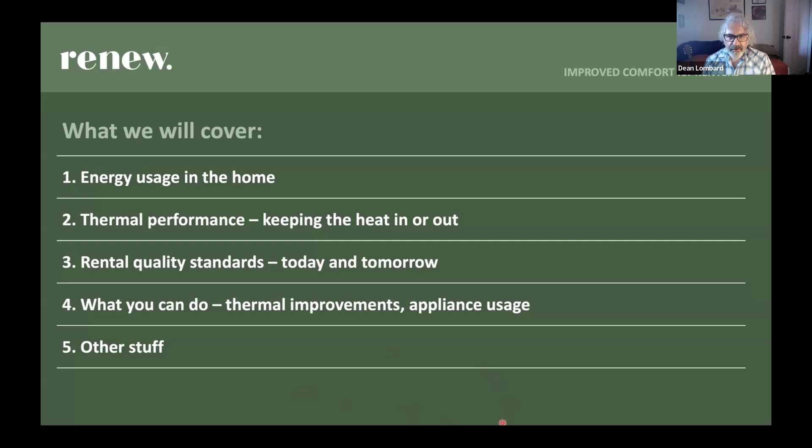Energy usage in the home. Energy is that thing where we don't really know much about how we use it generally. We know how much we pay for it when our bill comes, we know that we need it when we want to turn on an appliance, but we often don't really know how much appliances are used for different things.

This chart here is sort of an average Melbourne home and what proportion of its total energy use is used for these different functions. I think this is good to understand because if you're trying to save money on energy, use energy more effectively, you want to think about what are the biggest usages and how can you improve the way that you use those. So of course this is an average.

It varies a lot according to the types of appliances you have and the climate and the weather patterns, as well as your lifestyle. But generally speaking, nearly half your energy that you use in a year in Melbourne is used for heating, because we're actually a relatively cold climate most of the time. Not that much for cooling, but it's still significant.

The next biggest chunk is hot water, which is nearly 30%. That varies a lot depending on what sort of hot water appliance you have, and we'll be touching on those appliances a bit later. Cooking, not very much. Fridge, also not very much, but both of those are more than the smaller stuff like lighting.

I often like to emphasize, fridges do use... a good fridge uses a bit less than 5%, but a bad fridge, like an old inefficient fridge, can use 2 or 3 times that much.

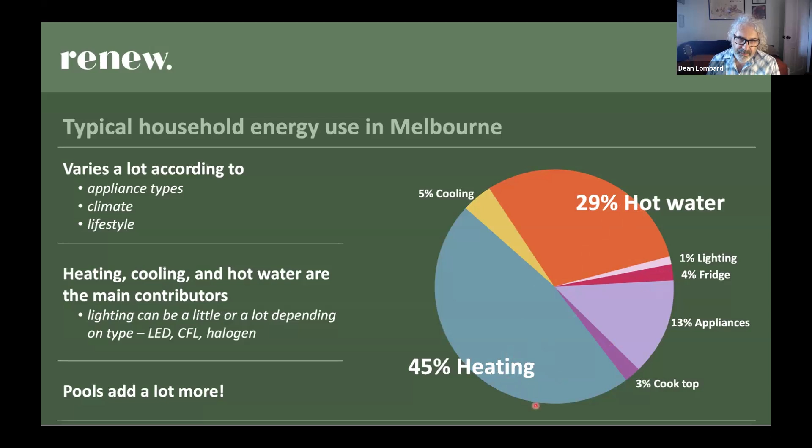Fridges are one of the most effective ways people can improve their energy usage in the home, without looking at heating and hot water. Get a more efficient fridge—really old fridges use a lot more than modern efficient ones. But for the purposes of this, we're really going to be focusing on hot water and heating.

They are the ones that most affect energy usage, and heating and cooling most affects how comfortable you are. I also like to remind people that your electricity and gas bills have really useful information on them. One useful thing is this little chart that usually shows your bill amount or energy usage over the last several bills.

It's useful to know your energy usage per day in kilowatt hours and how that compares with the average for the number of people in your household. It's good to compare what you're doing with others, because it shows you if you've got an opportunity to save a lot of energy or just a little.

The Energy Made Easy website—.gov.au—has a really good and easy to use comparison of home energy usage. You type in your postcode and how many people are in your house, and it'll tell you how much electricity or gas people in your area with the same number of people use. That gives you more of a clue as to whether you're using a typical amount of energy, or less or more. If you're using a lot more, that's when you probably know there's something you might be able to do to use less.

Anyway, that's the basics. Thermal performance—I like to say the house is our biggest appliance. It's an appliance designed to keep you comfortable and to keep all your stuff out of the weather. A good principle for the thermal performance of housing, for anything really to do with comfort and temperature, is that heat goes to anything that's colder than it.

That's why when you put warm cans in an esky with ice, the ice melts—because the heat from the warm cans goes into the cold ice and melts it. That's actually what makes your drinks cold. But that's a general principle: in winter, you fill your house full of heat with your heater, and it tries to get out any way it can to the cold air outside.

Unfortunately, as a renter, you can't really do much about that unless your house already has it. I've known some people who've had a chat with their landlord and got them to install insulation. Other people don't want to bring it up because they're trying to keep a low profile—we're all in different situations. It's always worth sticking your head up into the little access hatch in your ceiling to see what sort of insulation is there, just so you know what you've got.

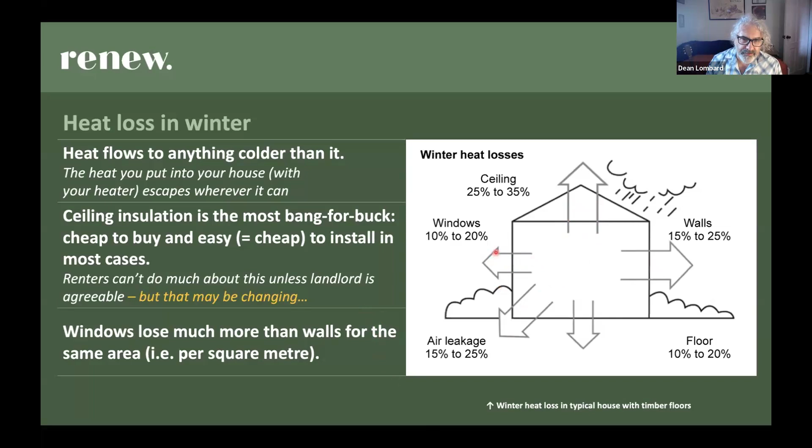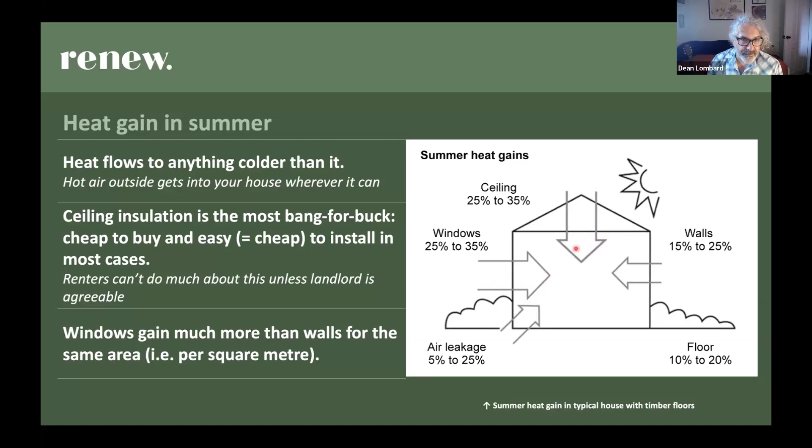In summer, it's pretty much the same areas, but the opposite. The hot air outside tries to get into your house, which is probably still a bit cooler inside at the start of the day. It comes in from the same ways, so again the windows are really important, and so is the ceiling.

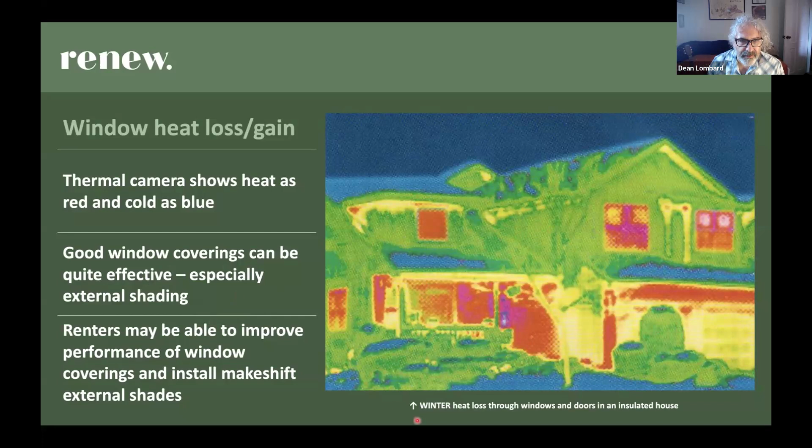I like to show this picture to illustrate the point about windows. This was taken with a thermal camera, which photographs heat - red bits are hotter, green and blue bits are colder. This is winter, and this house has ceiling insulation, so heat isn't coming out through the ceiling. But the heat inside is coming out through all the windows, the doors, and the garage door. This shows that windows are one of the most important parts of this - even with great ceiling insulation, windows become the weakest point. It's the thinnest part of the house, where you're most likely to lose heat, and good window coverings make a really big difference. We'll talk about window coverings in a bit, but that's the point.

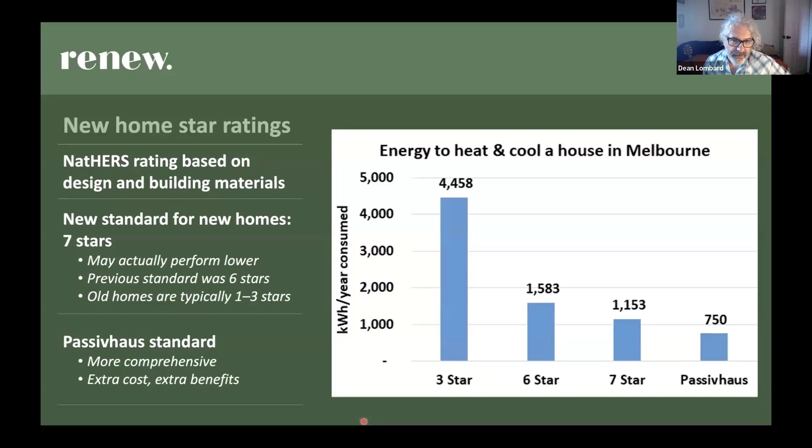So if you're in a newer house, you've probably already got some of these benefits. If you owned a house, this would show why it's important to add thermal improvements. And if you're renting a more than 20-year-old house like I am, this shows how far behind the eight ball we are, because we don't have the authority to add ceiling insulation or fix drafts, walls, and windows. This is actually the background to one of the reasons we've had these changes in rental regulations lately to improve quality - and that's what I'm going to talk about next.

Until a few years ago, there were no quality standards at all for rental houses. In fact, the only thing a rental house had to have to be legally rented out was a smoke alarm. You could rent out a house without glass in the windows, without a lock on the door, with no ceiling insulation, without running water, without a toilet - as long as it had a smoke alarm, you could rent it out.

That's a huge oversight of regulation for decades in Victoria, and it was addressed a few years ago because these issues - health, safety, and utility costs - were known problems for tenants, and most owners of rental properties didn't take up government schemes offering discounted upgrades such as free ceiling insulation. We also found from research that the quality of a house didn't really have any bearing on the rent being asked, except at the very high end of the market. In the same street, a house in poor condition and one in good condition would go for the same price. So the market wasn't working - that's one reason these standards came in.

As Kelly mentioned earlier, there's a longer term thing happening where the gas network is declining, gas is running out and becoming expensive. Efficient electric appliances are much cheaper, and we're moving towards a world where most houses will have electric appliances instead of gas. Rental standards are also part of ensuring rental houses upgrade to efficient electric appliances rather than stay on the gas network, which will ultimately cost people more money.

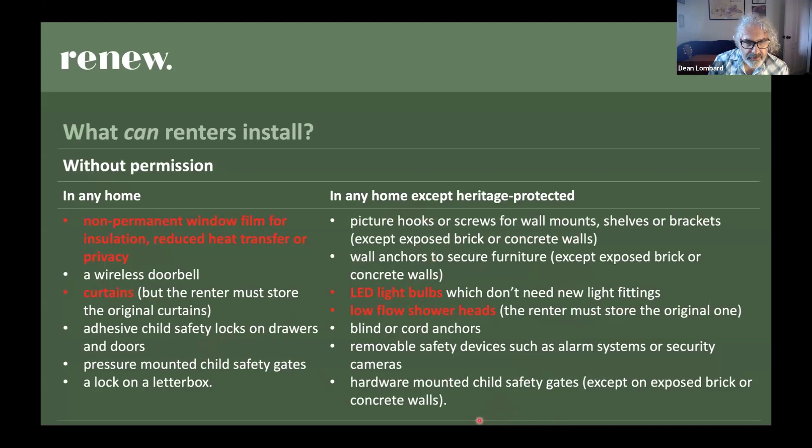I wonder if ceiling insulation might come into this. If you ask the landlord to have ceiling insulation installed, they would sort of have to agree. You'd have to get it installed professionally, but that's probably only an option if you're going to be in a house for a long time, because it's a bit expensive and has a few years' payback.

Now, there's some new standards coming in. They've done the consultation on this - they were supposed to announce them a month ago, but they didn't, which is why all the dates are a bit uncertain. But these are basically some improvements, building on those existing standards.

One of them is that from the end of life of existing heating, they'll have to replace it with an electric heater with 2 stars minimum. There's also a cooling requirement on a new rental agreement, or at the end of life of existing cooling.

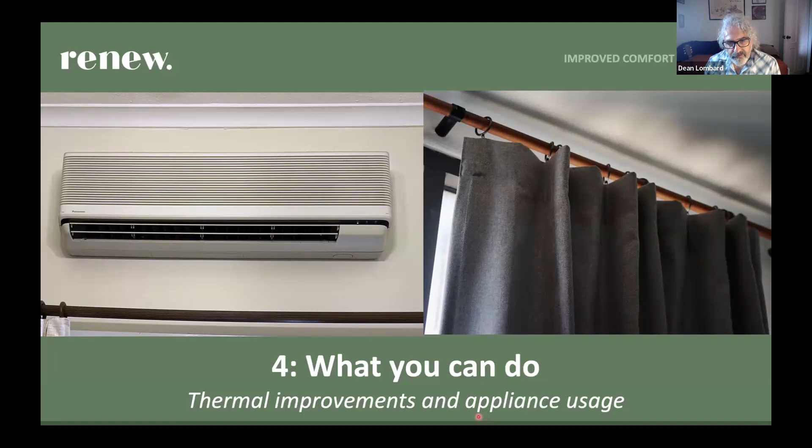I'm now going to talk about some of the stuff you can do as a tenant to improve how your house performs with energy. I'll make a note when the stuff is already covered in those standards, because some of it we can expect to see the landlord or owner being required to do. I did want to quickly throw this out there.

There's this thing called the Residential Efficiency Scorecard. It's basically a household assessment tool where an assessor will come out and look at a house, looking at the insulation, the windows, and the appliances, and give a report on how well the house performs in terms of energy usage. This is really useful because if you've got a house with issues you don't know about, these reports help identify the biggest bang for buck, like doing something with a particular window.

Obviously there's a lot more potential for an owner to make use of this tool than a tenant. But I've had one done as a tenant, and the assessor gave me advice based around what I could do as a tenant to improve my energy usage. So I still found it useful.

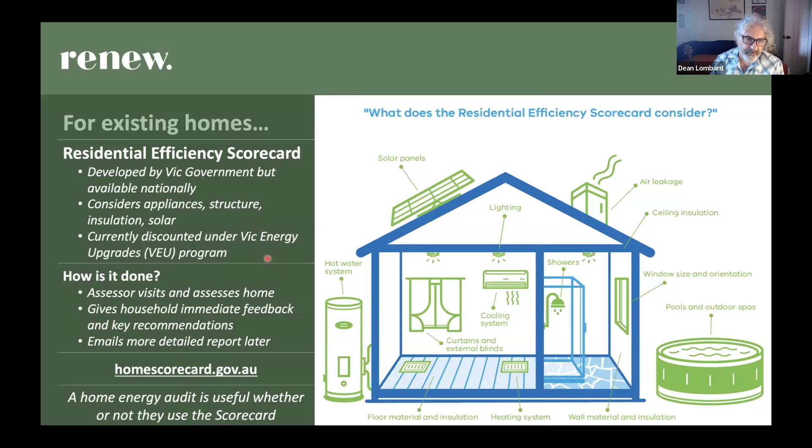Something to think about, probably if you're pretty confident you'll be in a house for some time, because you have to pay for these. They generally cost between $250 and $500, which is a bit of money, but you can get a discount through the Victoria Energy Upgrades program of $120, which means it could end up being a few hundred dollars. If you knew you were going to be in a house for 3 or 4 years, that might be worth spending to find out how to save energy and money. That's your call, I guess. I was lucky with mine, I got it for free when the scheme first came out and they were doing free ones for renters.

The other way to do it is to look at the obvious stuff, like are there drafts? I'll talk about this in a bit.

I wanted to make this note about insulation. I've known some tenants who've attempted to put in their own ceiling insulation. This is really not recommended. It's not a type of modification that tenants are permitted to do, and it's also very inadvisable for anyone without the experience or training, because there are serious safety issues with installing insulation, due to electrical wires and other hazardous materials in the ceiling. If you were installing ceiling insulation in your rental house and it caused a fire, that could be pretty bad in lots of ways. So just don't.

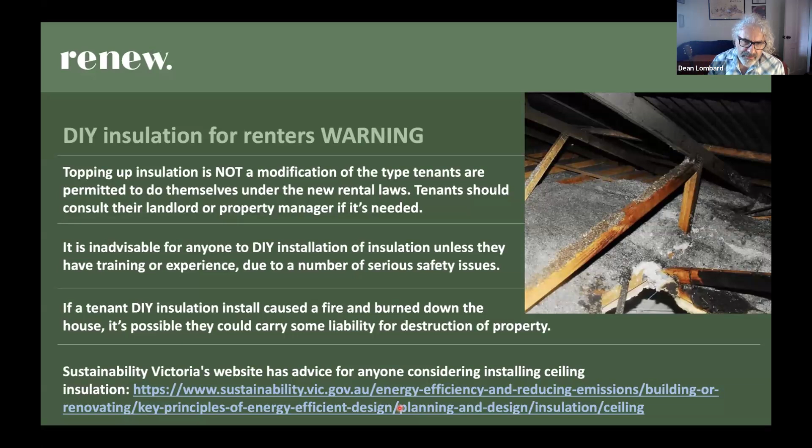If you really want to get some movement on insulation, I'd talk to your landlord. If you're pretty confident you'll be in a house for several years, it might even be worth cost-sharing it with the landlord if that's what you needed to get it over the line, because ceiling insulation can save a lot of money. But yeah, don't try doing it yourself.

The most effective things renters can do is really window coverings, if your curtains are not very good. You can get special thermal curtains designed to stop heat from passing through, and they're quite expensive but work really well. But really, any thick curtain will do the job. I generally say if you could use a curtain as a blanket, then it will work well as a thermal curtain. The most important thing is that they cover the window fully.

Ideally they go past each side a bit, and up past the top and down past the bottom, to completely cover the glass in the window, because the glass really conducts heat a lot. That's what happens: the warm air in your house hits the cold glass and goes straight through. The same thing happens in summer with heat getting into the house, but the effect is even more in winter.

So if the curtains in your house are just thin and the light shines through them, you can get thick curtains pretty cheaply from op shops, garage sales, and stuff. Hang them yourself, because you're permitted to do it without permission, and it can make quite a difference.

To get the best difference, you would improvise pelmets, which are like a cover that goes over the top of the curtain. I've done them before with pieces of cardboard or corflute, resting on top of the curtain rod, with a bit stuck on it going down the front. It just stops this thing that happens, which is on the next slide.

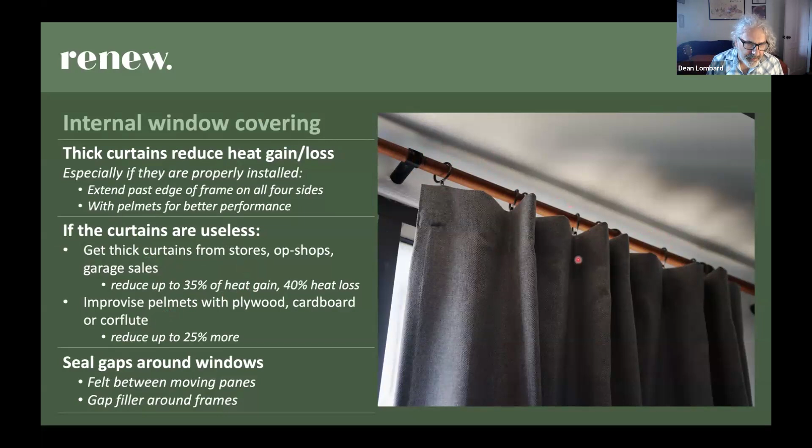There's this whole thing that happens when the warm air in the room goes down between the curtain and the window, and all the heat gets sucked out through the window. The air becomes cold, then it comes around again at the bottom and creates a cold draft, actually making you colder. Covering it with a pelmet, which is this thing here, stops that whole process and makes a huge difference.

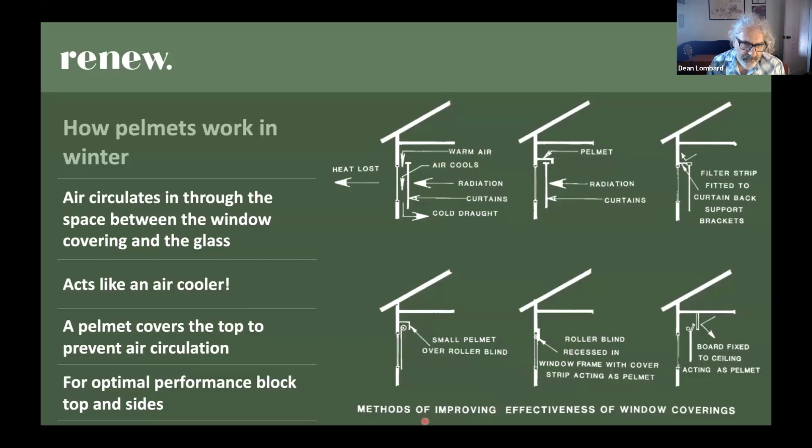Window coverings stop about 40% of the heat loss that would otherwise go through the glass. Pelmets reduce that by about another 25%. They're very effective, so you can improvise them, and that's a good thing to do if your curtains aren't well set up.

You've probably heard of double glazing, which is expensive windows with two bits of glass that have air between them. This is standard in Europe and other cold climates, and it's now pretty much required by the modern building code in Australia for new houses. But I thought it was interesting to point out a study done by Sustainability Victoria a few years ago, which found that thick drapes with pelmets save almost as much energy as double glazing, for much less cost.

So this is just to run the point home: curtains are really effective at keeping heat inside your house, and pretty good at keeping heat outside the house in summer.

The other thing is what they call renter's double glazing, which is bubble wrap stuck to the window. This is a photo of my window in my lounge room. I haven't done pelmets in this place. These are relatively thick curtains, but I still used to get this cold air feeling off these windows because it's such a big window. So I tried this thing that had been recommended to me, which is to stick bubble wrap on the glass, and it makes a heap of difference.

It cuts down the thermal transfer because it's like double glazing. It creates an air pocket between the room and the glass, keeping warm air in the room separate from the cold glass. It's very easy to put on: you get a spray bottle, spray water on the window, and stick the bubble wrap on. Works great, very cheap.

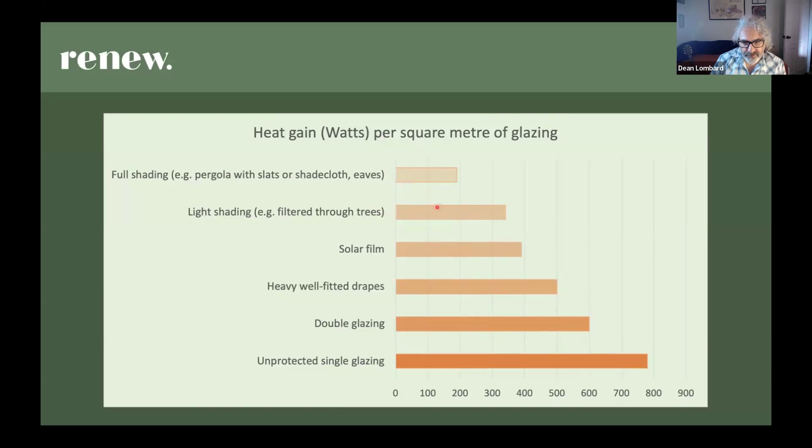That can be a bit tricky for tenants. It depends on what you can do. It's the sort of thing that's often done by the way a house is built, like eaves, or if there happen to be trees planted outside.

One of the principles here is that the sun is higher in summer than in winter, and well-designed eaves or pergolas like this will be designed to block the sun in summer so the window's shaded, but let the light through in winter, because in winter you want the sun shining through the window to warm up the house. If you owned a house, a good way to do it is to put these slatted pergolas with the angle set just right to let the winter sun through, but not the summer sun.

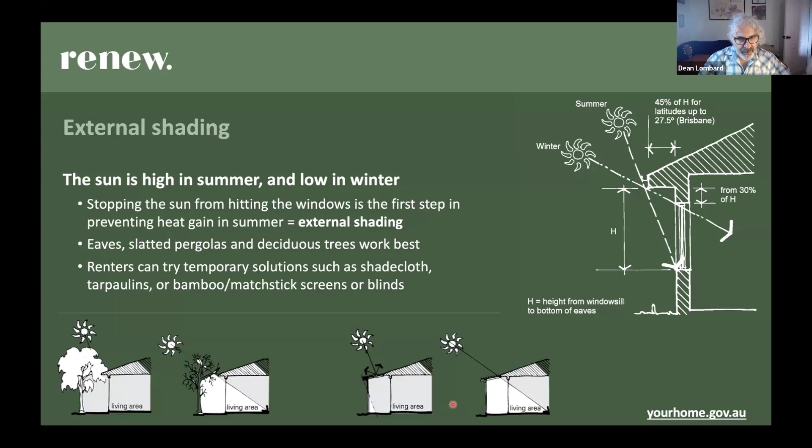As a renter, though, you've got some opportunities to put stuff on the outside of your windows on hot days. Shade cloth or tarpaulins, bamboo or matchstick screens or blinds. I've certainly got a big window at my place where I attach some shade cloth underneath the eaves and stretch it out to a couple of tent poles in the backyard to make a shaded area.

Works quite well. Here's some pictures of some different window treatments. This one is obviously a custom-made sort of shade cloth, but you can see how effective it is. You can sort of improvise stuff like this, stretch it to a fence, a tree, or a tent pole like I've done.

This is a picture of those slats, which you can't really do unless you own a place. If you've got these blinds on your place, and a lot of old places have these, they work very well. They're quite thick and have good thermal properties.

Another way of doing it is you can use bulldog clips to clip shade cloth to the guttering, and then either hang it down or stretch it out and attach it to the top of the fence or to a tent pole. I use tent poles, very useful. These are the sort of improvised solutions that aren't quite as effective as having it done properly, but they will make a big difference.

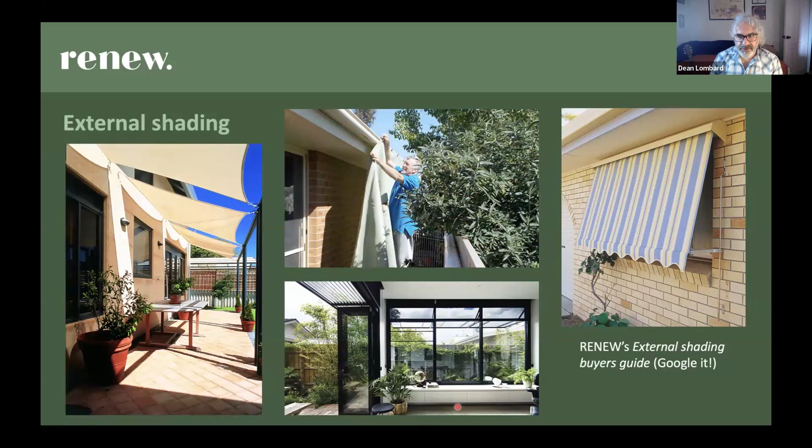As that chart showed before, keeping the sun off the windows in summer is the number one thing you want to do to keep cooler in summer.

As mentioned before, the current rental standards say the house has to be structurally sound, which probably means no gaping holes, and you get big drafts through gaping holes. The new standard requires draft sealing around doors and a few other areas of the house. That will make a big difference.

But the other thing in the current standards is that you are permitted to do draft blocking, including installing seals and using caulking to fill gaps with permission, but the owner cannot unreasonably refuse permission. So if you can identify where the biggest gaps are, you could talk to your landlord about it, or do stuff that's sort of structural to fix them.

A good way to find drafts is on a windy day, walk around the house in bare feet and you'll feel them. Some people use an incense stick or a candle and see which way the flame blows, then follow it back the other way, because there shouldn't be a breeze in your house unless there's a draft.

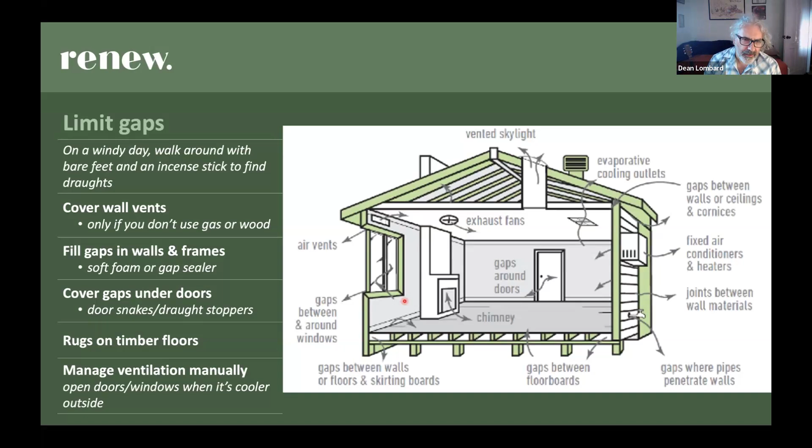It's good to think about ventilation as a positive thing too. In summer, monitor the outside temperature versus the inside temperature. Having a couple of thermometers is good for this, because when it gets cool outside, that's when you want to open up some windows and doors so the cooler air comes in and cools the house down. Vice versa, once it starts getting hotter outside, that's when you want to close up doors and windows to keep the cool air in.

This thing about thermal mass, I'll just throw this in. There's nothing you can do about it - basically your house will have thermal mass or it won't. Thermal mass is solid, dense material that soaks up heat, like a brick wall or a slab of concrete. It soaks up the heat, stores it, and then when the air outside becomes cooler, it releases the heat back out.

This is great in winter if you've got a brick wall. I've got a wall in my house that's a brick wall the sun shines on, with a big concrete driveway next to it. As soon as the sun goes down, it radiates into the house from all that thermal mass, all that heat stored in the concrete and brick, and it's great. In summer it has the opposite problem, because it does the same thing - it soaks up the heat and throws it into the house that I'm trying to keep cool. So in summer I put some shade cloth over it so it doesn't get direct sun, doesn't soak up as much heat, and doesn't make my house as hot.

This is an example of something you can't do much about - whether you've got thermal mass in annoying places or not - but have a look around and figure it out. If you've got thermal mass that gets sun, work out if you can cover it during summer or make use of it during winter, to use the heat or keep the heat, depending on the season.

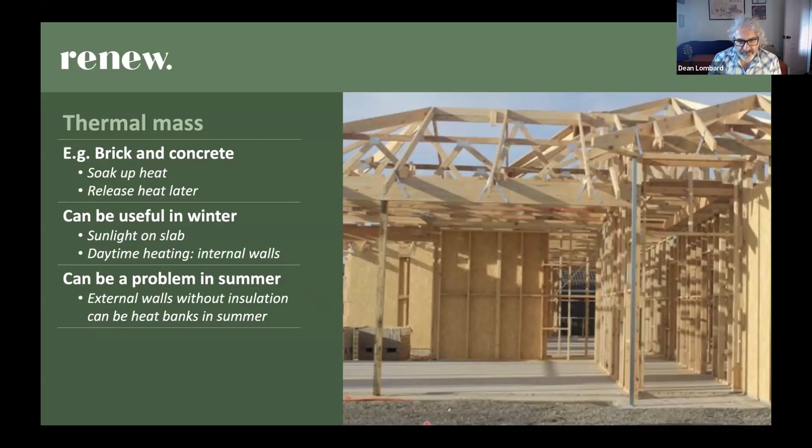That's the main stuff about thermal performance. I may have missed some stuff, so please throw questions in the Q&A if there's something you want to know that I didn't cover.

Standard types of heating you might have: a reverse cycle air conditioner, a console gas heater or a wall furnace - the tall ones - or a ducted heater. These all comply with the current rules around heating in rental houses. The gas ones, though, when the new rules come in, will need to be replaced with some form of electric heating when they reach their end of life. That's part of the government roadmap towards electrification, as gas becomes more expensive and harder to get. But for now, they're all allowed.

Some houses have both, because a lot of places have a reverse cycle air conditioner installed as well as a gas heater. Good to know is that reverse cycle air conditioners, if they cool and heat, are much cheaper to run for heating than any gas heater because they're much more efficient - 400 to 600% efficient, compared to 80% efficient for a console heater and as low as 50% efficient for ducted heating. They cost less because they basically extract heat from the air to make the heat that goes into the house.

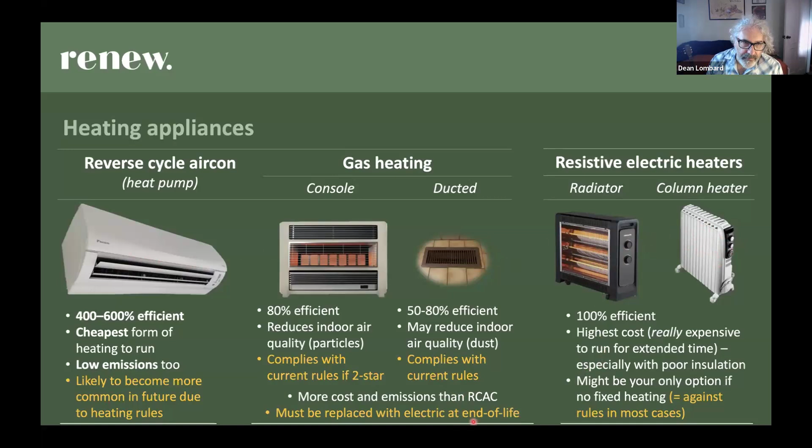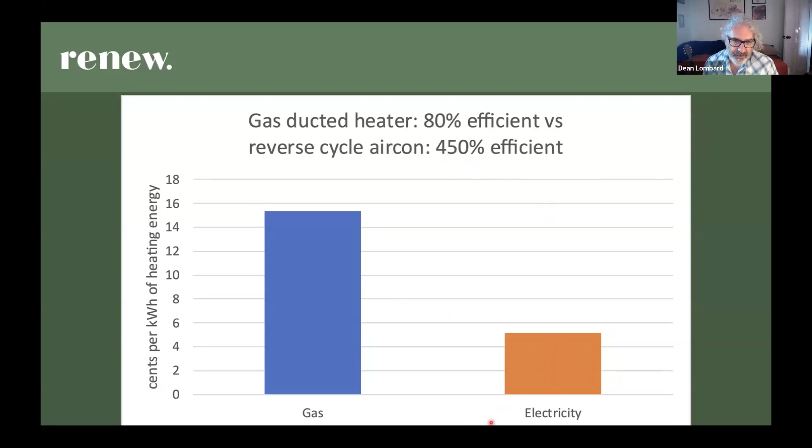Here's a price example, just because sometimes people don't believe me. This is the cost comparison of doing the same amount of heating with a gas heater versus a relatively not particularly efficient reverse cycle air conditioner - it's less than half the cost. This one is 450% efficient, and it's actually not a very good one, probably a 10-year-old model. So it's much cheaper - we did this analysis at Renew. It's undeniable, it's so much cheaper to heat with a reverse cycle air conditioner than a gas heater. Keep that in mind, because a lot of people don't know that.

Cooling appliances - it is getting hotter, we're getting hot days more often. Cooling will be part of the new rental regulations, expected no longer in October 2025, but probably early 2026.

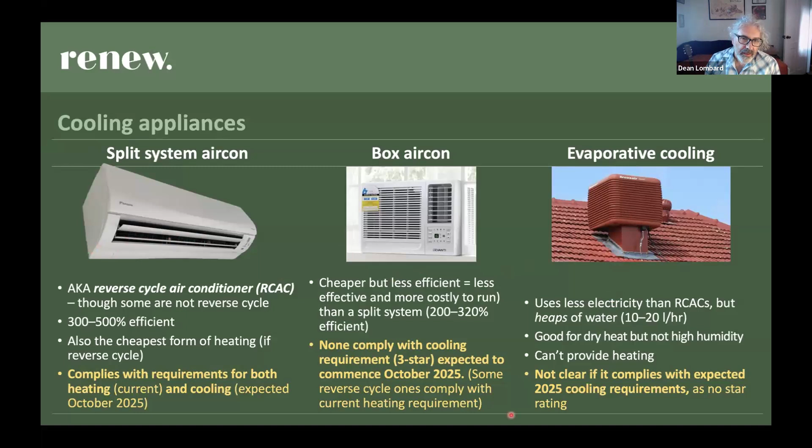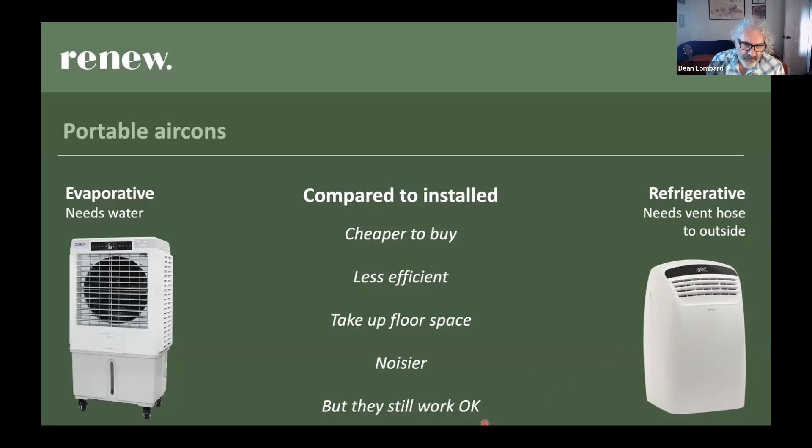For places without cooling, I know some people use portable air conditioners. These are basically versions of what I talked about in the previous slide - the ones you need to put water in are the same as those on the roof, and the ones that need a hose going outside are the same as the ones on your wall. They're relatively cheap to buy compared to installing those other things, but they're less efficient and a bit noisier. They work okay - if you need cooling and you've got one of these, it's not the worst thing in the world. But hopefully when that cooling requirement comes in, it won't be necessary.

General heating tips: especially if you've got heaters in certain rooms, close the doors and just heat the rooms you're using - a heater designed for one room won't be enough to heat the whole house. But if you've got ducted heating, you need to keep doors open so the heat can circulate and return to the inlet.

Otherwise, you'll actually get a draft that'll make you feel colder. In bathrooms, fan heaters or ducted heaters are not so good, because the moving air cools you, even if it's hot air. And when you're wet, you feel it more.

So the best heating for bathrooms is strip heaters like this, or if you've got these installed, those heat lamps. Just make sure you remember to turn them off. They don't use that much electricity if they're on for 10 minutes, but if you leave them on all day, they do.

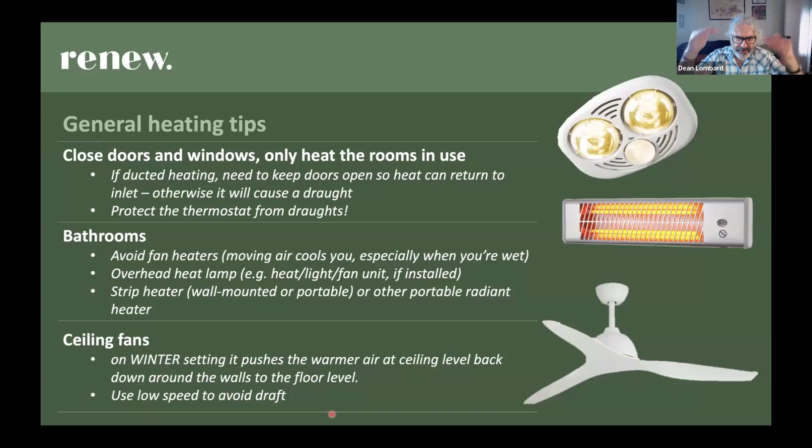So some sort of radiant heat is good for bathrooms. If you've got ceiling fans, they normally have a winter setting that actually helps to spread the heat around the room. Find the winter setting of your ceiling fans if you've got them, and use them when you're heating. Use them on low speed so that you don't get a draft, but they're quite effective at recirculating the warm air that tends to gather at the top of the room.

If your heating's really ineffective, think about personal heating. In the end, it's your body that you need to keep warm. Heating the room is nice. Heating the body is important.

You can get electric throw rugs. There's lots of options, small radiant heaters, especially if you're working from home in a cold room. Put warmer clothing on. Hot water bottles and wheat packs are also useful for personal heating.

Be careful of the safety risks with these, though. Hot water bottles should be replaced every year, and you shouldn't use boiling water - you should put water in that's about 70 degrees. And wheat packs, follow the instructions. If you overheat them, they can catch fire.

General cooling tips: fans work pretty well. I've got one going now. They work on the same principle as ceiling fans, and for the same reason that you shouldn't use a fan heater in a bathroom - the moving air makes you feel cooler, even if the air is warm.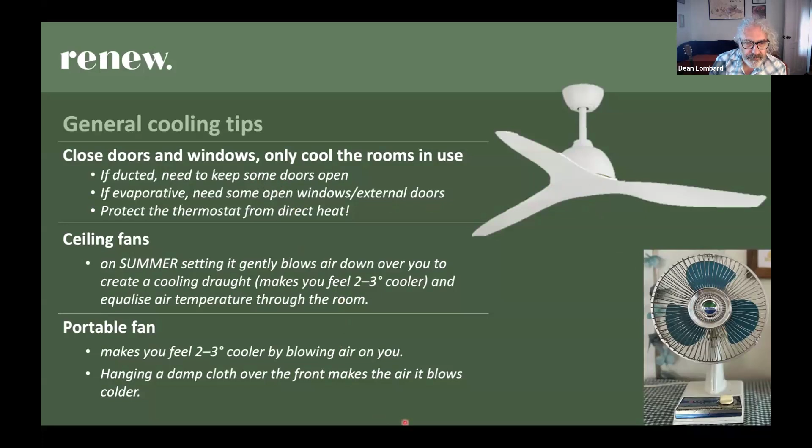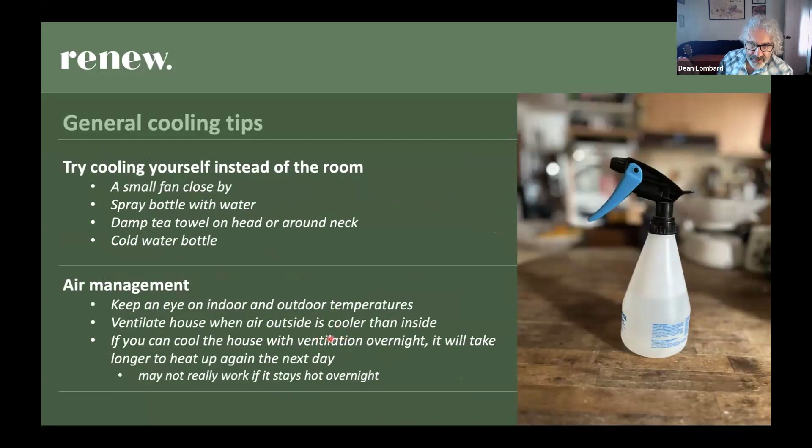Again, for personal cooling, when it's really hot, spray yourself with water, use a damp tea towel, etc. And keep an eye on those indoor and outdoor temperatures. As soon as the air outside gets cooler, open them up and your house will cool down.

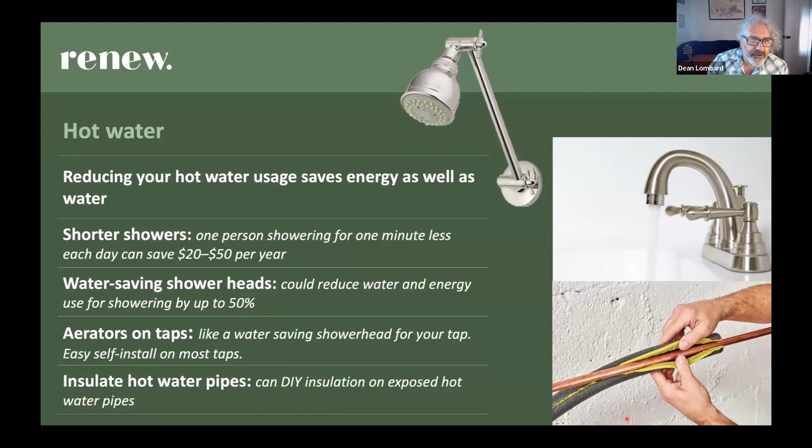Other stuff, just briefly - lighting used to be a big deal for energy efficiency. Now less so because LED lights are the standard. If you don't have LED lights, get them. They use so much less energy than halogen or even compact fluorescent lights.

Highly recommended. The very, very cheapest ones are a bit unreliable, as in some of them might wear out more quickly than others, but most of them last for a long time. Even the cheap ones generally last for quite a while. I just found a bit of a higher failure rate among cheaper ones than among slightly more expensive ones. But definitely recommend LED lights for anything.

If you've got those little ceiling lights, they're sometimes halogen. You can often get LED lights that just fit into the same sockets, but you'll need to check because not all of them can do that.

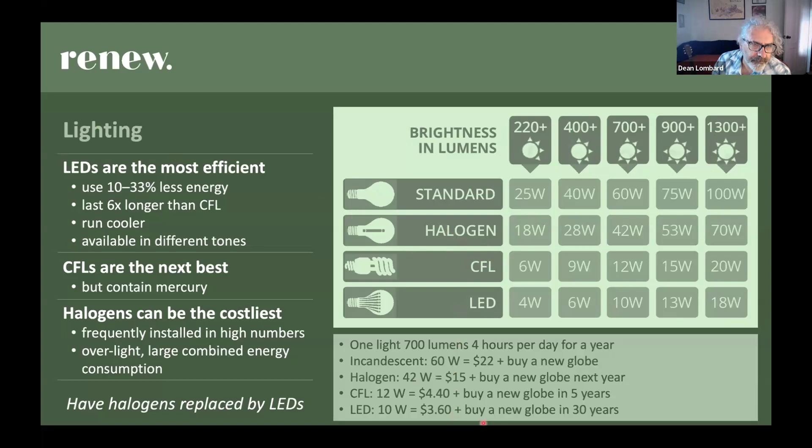And if you're buying appliances like fridges, washing machines, etc., look for the energy rating, and it's usually worth it to buy a more efficient one, even if it costs more money, because it uses less energy.

These little energy rating stickers normally have an amount on there that says how much electricity they use in a year. You can compare them to each other, and you can basically work out the difference in cost by multiplying that amount of energy by the amount that you pay for energy.

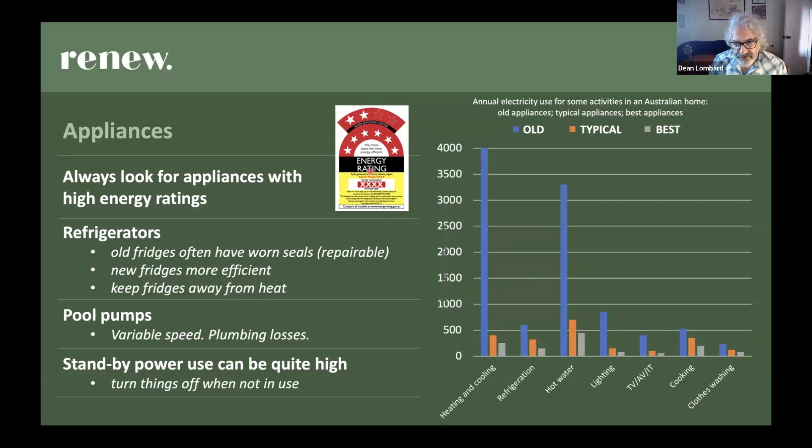You can see in this chart for refrigeration, the lowest efficiency modern fridge uses half the electricity of an old fridge from before the energy rating system. A high efficiency fridge uses half less again. That's a huge difference when you consider the fridge is on all the time. So I do recommend you look at those energy rating stickers for any appliances you buy.

The last thing I wanted to touch on before we go to some resources is there's this whole solar scheme the Victorian Government has, and it includes a program for rental properties where it gives the owner of the house a discount plus an interest-free loan to put solar on rental properties, and the owner is responsible for the costs. The owner is not allowed to increase the rent or take money from the bond to cover the cost.

There is an option for the owner and the tenant to agree for the tenant to make a co-contribution, which they've got a formula for working out. It's up to about $230 a year, which in pretty much every case will be less than the amount of electricity that you'll save by having solar panels. Always worth working it out though.

If you're interested in getting solar on your rental property, speak to your landlord or property manager and tell them about this program. They might be interested. I've known some people who've done this and had a good outcome. Others, like I said, some people just don't really want to raise anything with their landlord because they want to keep a low profile. So it's really up to you to decide how approachable your landlord is.

Anyway, that's the main stuff, but I'm now going to move into some of the resources available, and Kelly is going to jump on to talk about what Hume Council is doing.

Thanks a lot, Dean. So from a Hume perspective, our main program is our home energy upgrades program. This is open to homeowners and landlords in the city of Hume to upgrade to more efficient appliances, so reverse cycle aircon, heat pump hot water systems, induction cooktops, along with rooftop solar, and then to improve the thermal performance with insulation and draft proofing.

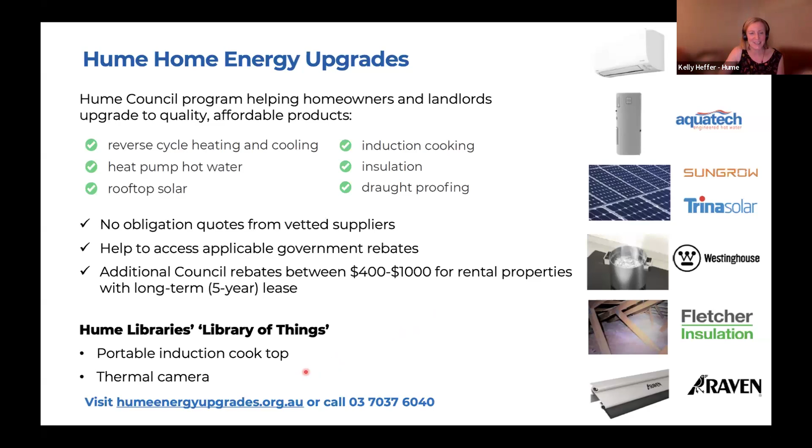I think that's me. Yeah, so here at Merri-bek, we've got a number of different offerings. Like Hume, we've got some resources to borrow from the library.

So we've got induction cooktops available to loan, and we've also got thermal cameras as well. As Dean pointed out earlier, thermal cameras are really great to identify where the heat gain or loss is happening. In addition to that, we've also got efficiency kits which include a range of different things you can test, such as water flow rates of taps, but also the energy consumption of something like a fridge or TV.

We're also part of the Solar Savers program, which is a local government initiative that helps residents install a bunch of different upgrades, as Dean went over in his slide deck, namely around heating and cooling systems, solar PV systems, hot water heat pumps, and also batteries.

We've also got financial support through a subsidy-based program where we support low-income households to either install a solar system or get thermal upgrades, including insulation and draft proofing. This is available for renters who are on a low income. The proviso is that both the landlord and the renter need to agree to this. The idea is that we pay the upfront cost of up to $3,000 for solar, or up to $2,000 for the insulation and sealing upgrade. We provide a service that supports the customer throughout that entire journey.